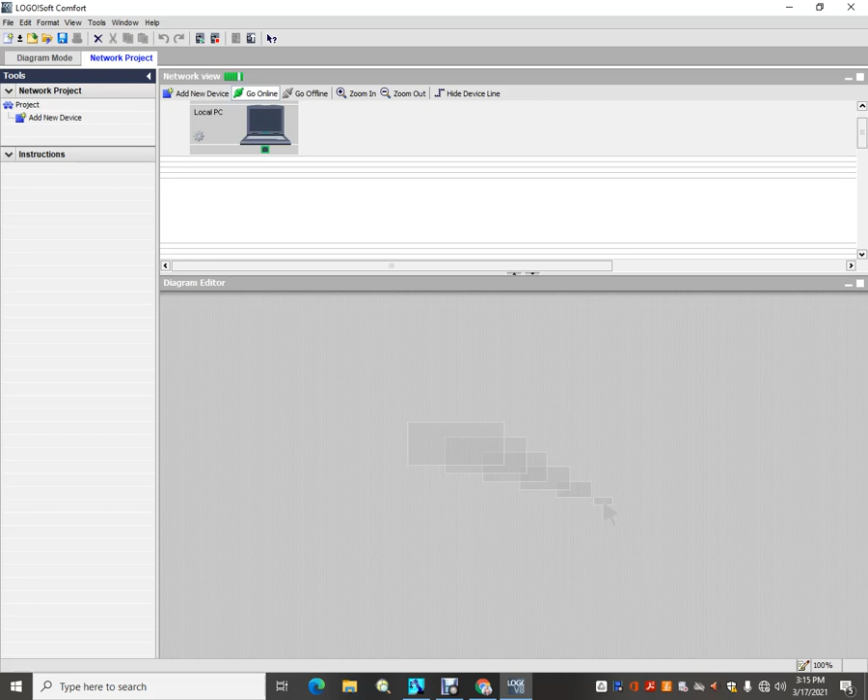So I'm set up to talk to the LOGO! machine. So the first thing that we want to do is go online to make sure that it's over there. You have to set the Ethernet cord into the back of the computer, and then it should find it, connect to it. Let's try off, and then let's try on again. There it is.

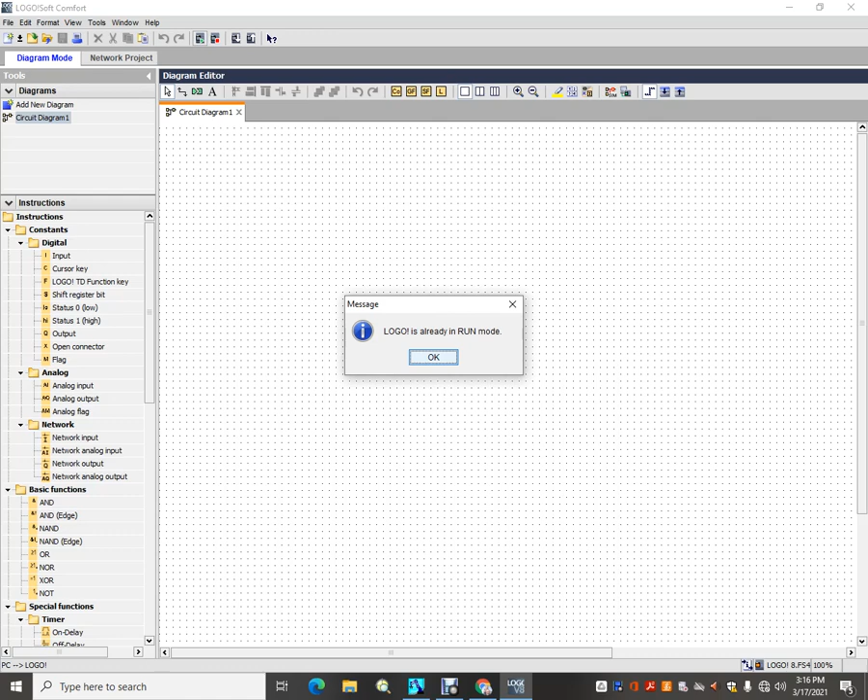All right, next thing is we want to test to make sure that we can send a signal to it. It's going to tell me something about the internet address not quite right. Let's go do that. So it's running. So we were able to check it before. I just had it running, so maybe we don't need to do that. Well, then let's do upload. So let's get what is in the machine right now. And there's our program that we set up for the lights.

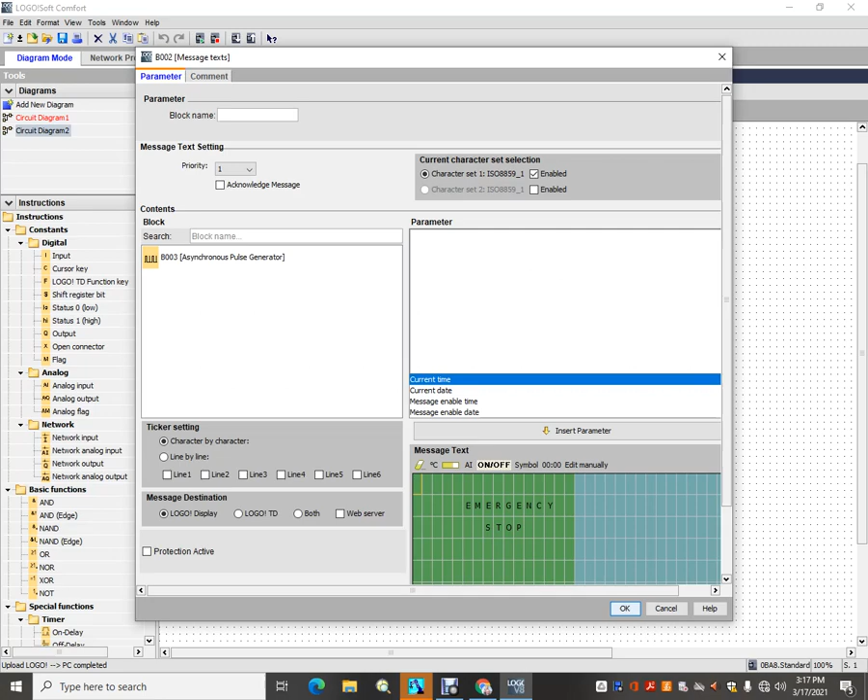Up here at the top is the green light. And then we change the screen to white with some words here. And the text on that is safe to operate. When the e-stop button is pushed, the light goes red. Our message then says emergency stop.

We're frequency generator, the light comes on, and then we also have the horn that comes on, and this one then is the proximity sensor. So we have one for the horn and the other one for the frequency generator.

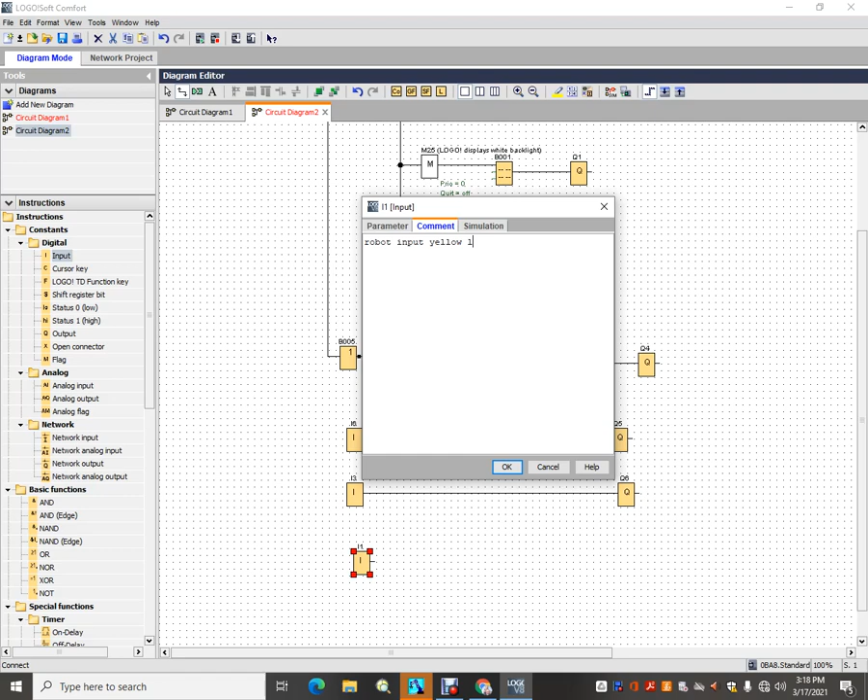So now let's add. I have the yellow light. When the robot turns on the yellow light, it's going to send an input number 2, so I have those wired together. Again, it's so much nicer if we have comments on here. So this is the robot input for yellow light. When you upload the program, evidently it doesn't give you the nice labels that we had before. And I have it wired to output number 7. This is the buzzer.

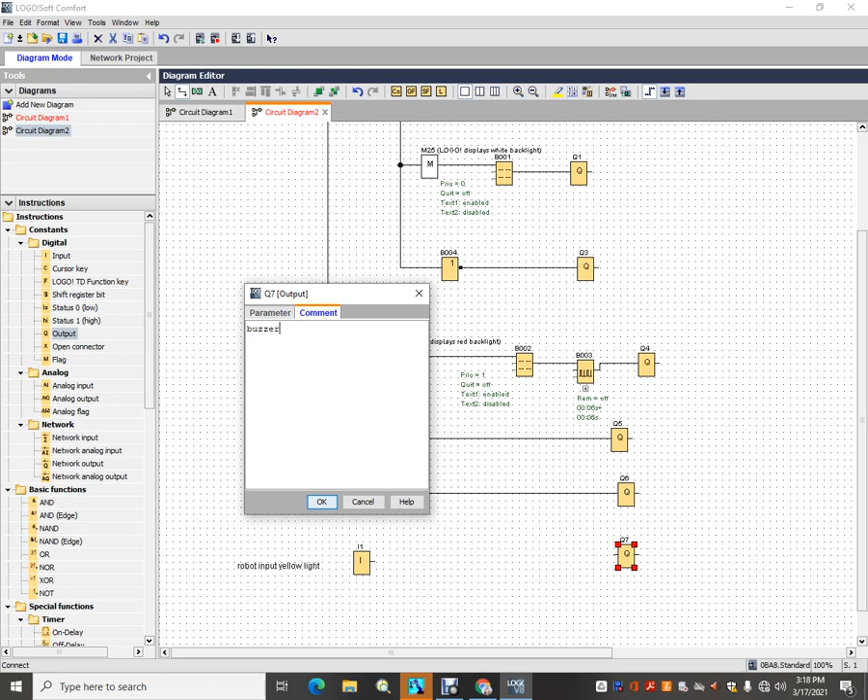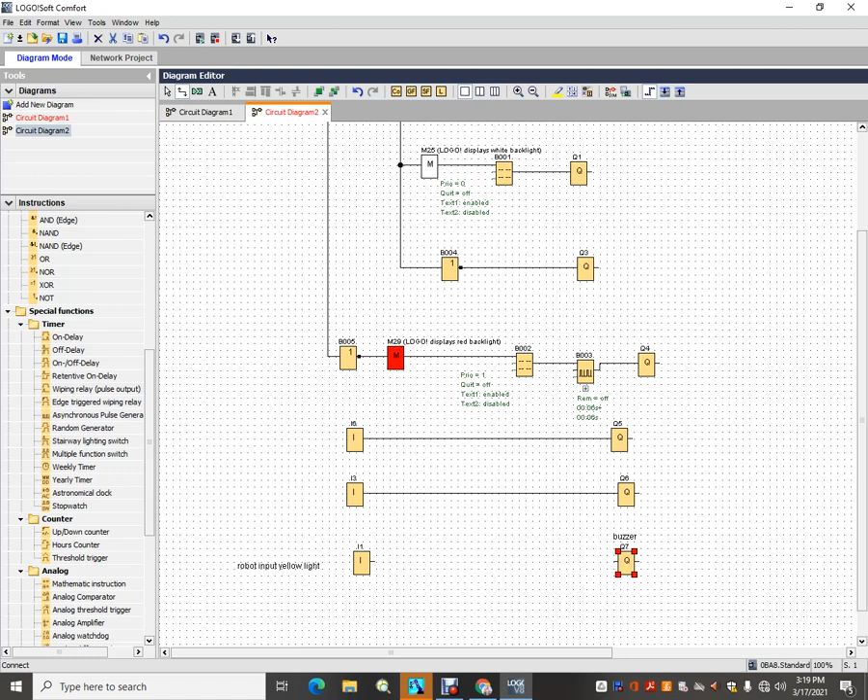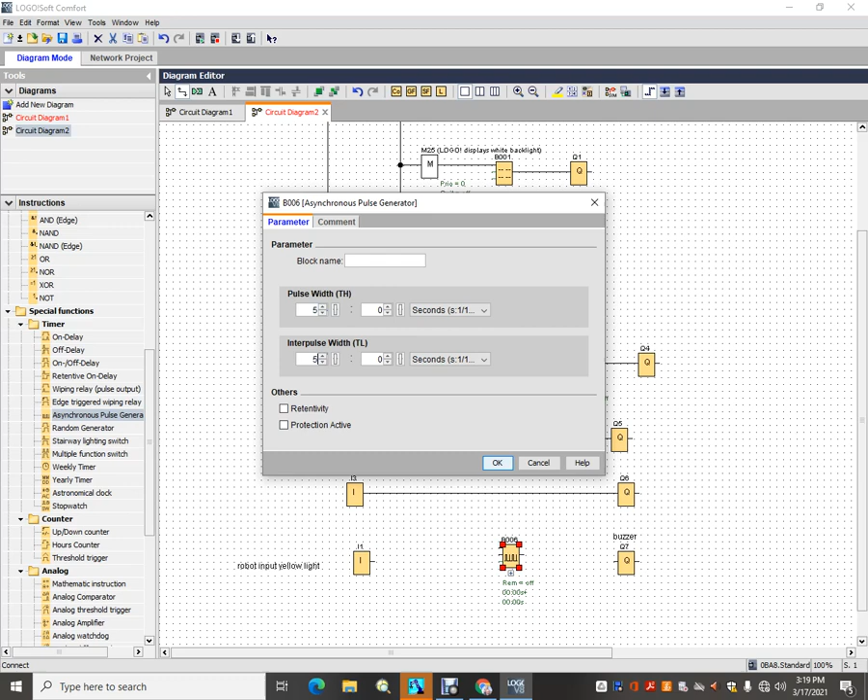Okay. But we want this to go on and off. So under our category of pulse generator, let's put that on there. And let's just try a couple of samples. We can modify this later, but let's do 5 and 5, and we'll see what that feels like when we're all done. Let's send that here, and we need to change this to number 2.

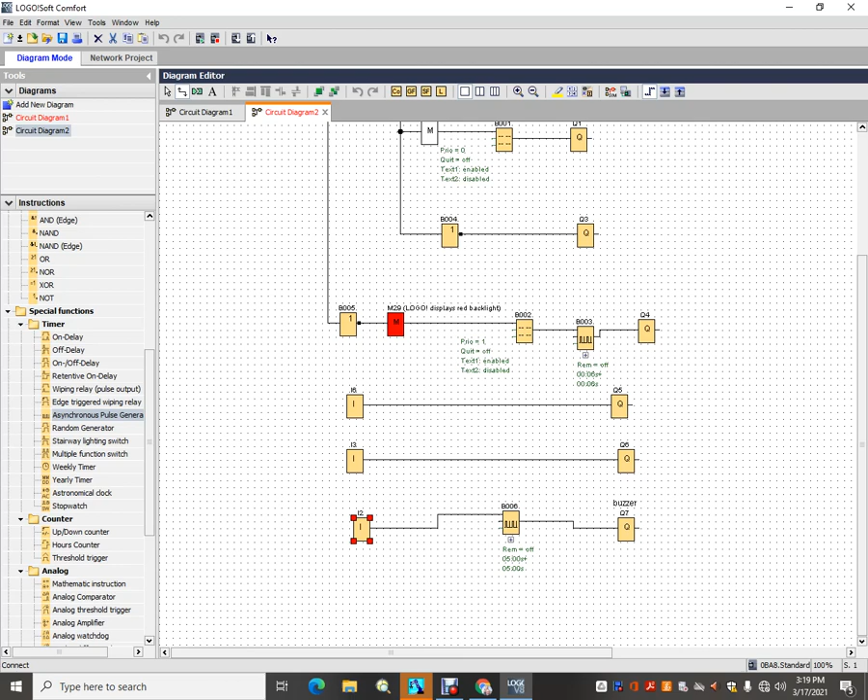Looks like we don't have a number 1. Oh yeah, I know why. Remember I told you way back when my fingers were too fat? I didn't want to get it close to the other one and have it mess up. So we could try our simulator. So let's do input 2. That seems like a long time, doesn't it? We're looking at number 7 here.

Number 4. Oh yeah. This is our red light going on, and then our horn is way up here. So you'll see the green light now. We're green to go up here. Let's change this though. Let's see if we can do 4 and 2. See what that looks like.

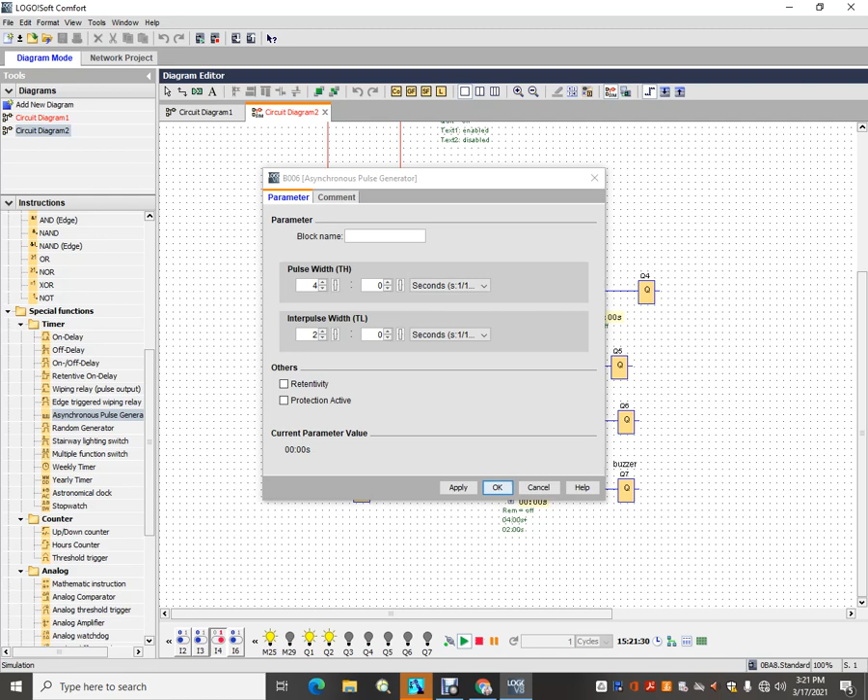Let's shorten that up even more. Let's do 3. And we can play with this once we see it, once we hear it. Because I'll have to turn the tape off and pause the controller so I can get back online with the video camera to be able to see this all happen in real time. But this is the way that we would set this up.

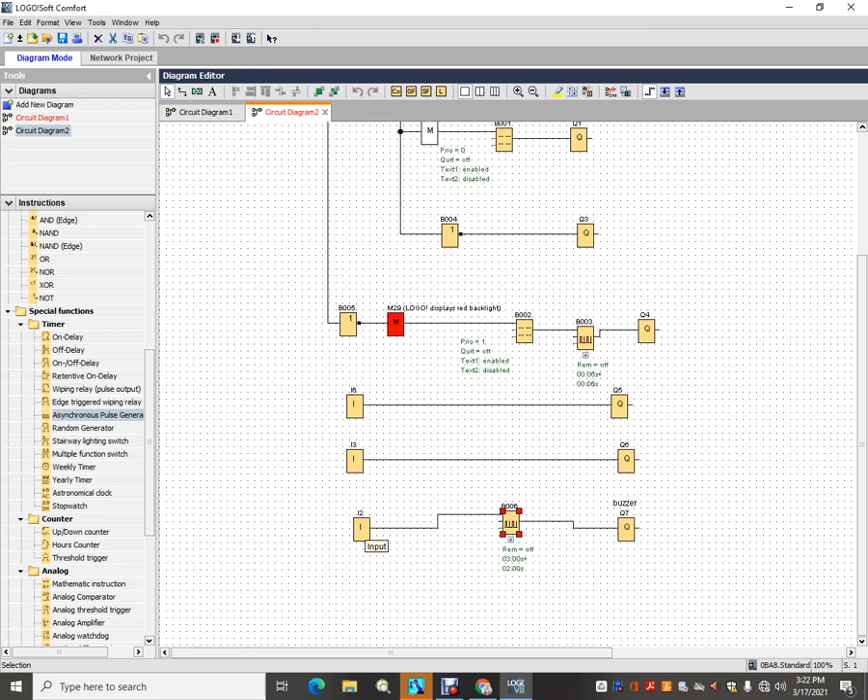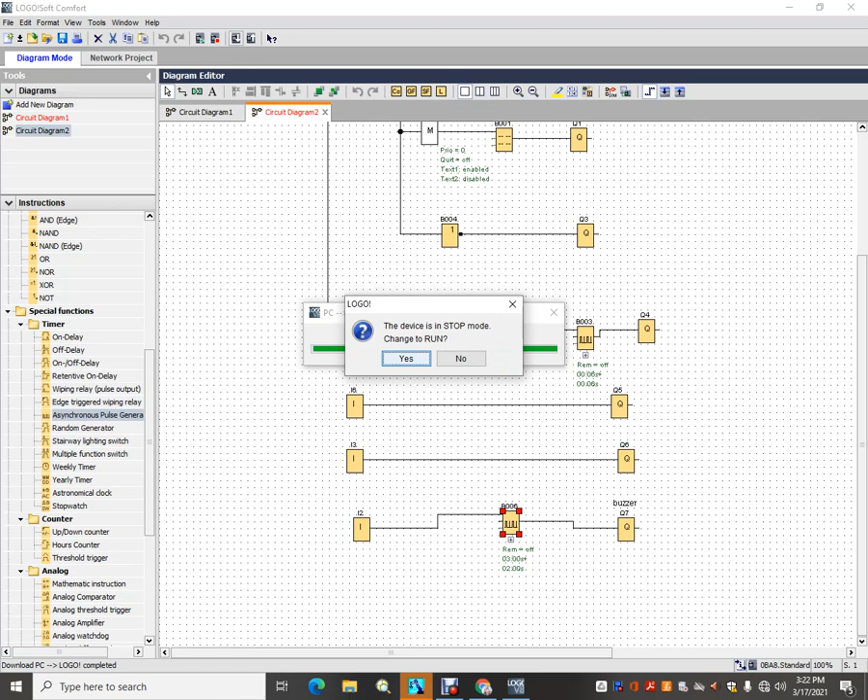So let's go back, download. So this is our yellow light input to our buzzer, and this is coming from the robot. So let's run it back to our LOGO! machine. Okay. All right, let me pause the camera. Maybe we can get this in one shot.